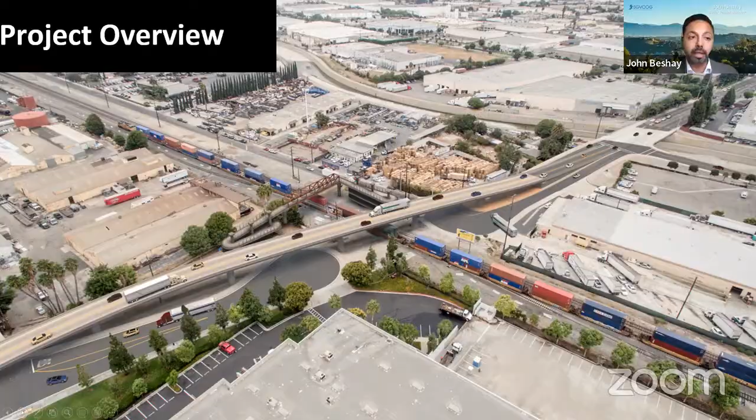The following design options were considered at the beginning of the project. First, raising Union Pacific Railroad tracks over Turnbull Canyon Road. Second, lowering Union Pacific tracks under Turnbull Canyon Road. Third, lowering Turnbull Canyon Road under the Union Pacific tracks. Fourth, raising Turnbull Canyon Road over Union Pacific tracks. And last is not to build a grade separation and do nothing.

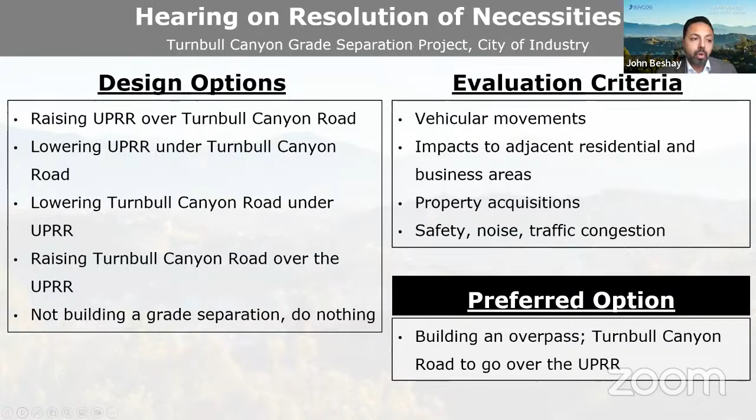Based on the evaluation criteria of vehicular movement, impacts to adjacent residential and business areas, property acquisitions, safety, noise, and traffic congestion, the preferred option was to build an overpass, which is Turnbull Canyon to go over the Union Pacific tracks. Next slide.

Now our legal counsel, David DeBerry, will provide brief introductory remarks regarding the resolution of necessity. David? Yes, thank you, John. And again, I apologize to the committee, for some reason my camera is not working. Before I start, I also wanted to introduce one of the partners in my law firm, Craig Farrington, and he's heading up the eminent domain acquisition. So if there's specific legal questions with respect to any of the particular RONs, I'll probably defer to Mr. Farrington to answer those questions.

But as was mentioned earlier, as I think all of you are aware, we now have a two-step process for adoptions of the resolution of necessity. First, it comes before the Capital Projects Committee to make a recommendation to the governing board whether or not to consider the final adoption of the resolutions of necessity. And what we're asking this committee to do is, in making that recommendation, to consider the same four things that the governing board needs to consider under the eminent domain law as to whether or not the resolutions of necessity should be adopted. And those are on the screen before you. I'll just go through them quickly.

And when we go into more detail on each resolution of necessity, the findings and the facts behind making these findings will be presented by Mr. Mendoza, who's a project manager. So the first one is the public interest and necessity require the project. The second, the proposed project is planned or located in a manner that will be most compatible with the greatest public good and least private injury. The acquisitions of interest in the property is necessary for the proposed project. And the last one is that the COG has made offers to purchase interest in the property as required by the government code.

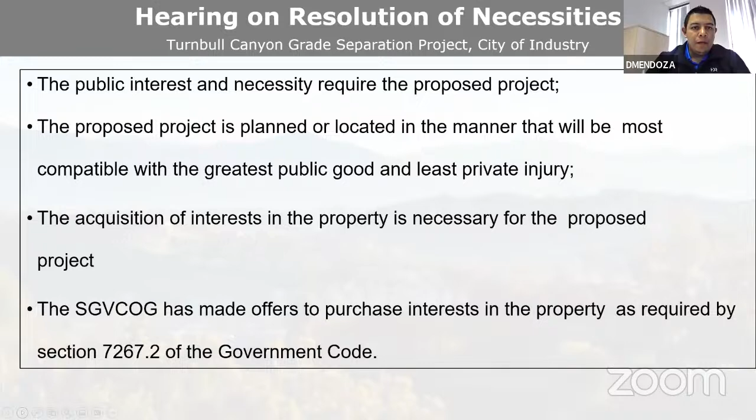Correct. I'll take it over. Okay. All right. We can go to the next slide. I'm going to touch a little bit on the parcels here. This is a 22 parcel project. Danny, sorry to interrupt you, but I see President Shevely has her hand up. Okay. I did, and David DeBerry, yes. I did have a question, given the public comment item about the legal descriptions. Is there anything that we need to be considering as a part of this recommendation?

No, on the legal descriptions, though, we can't change the take because we've already made an offer. So we could certainly have Mr. Nelson take a look at those. But as far as the property that we're taking, those can't be modified. Otherwise, we'll have to make a new offer. So we'll have to just get together with Josh after the meeting and see what his concerns might be. But if they don't change the property interest that we've made an offer for, then we'll be fine. Okay, great. Thank you.

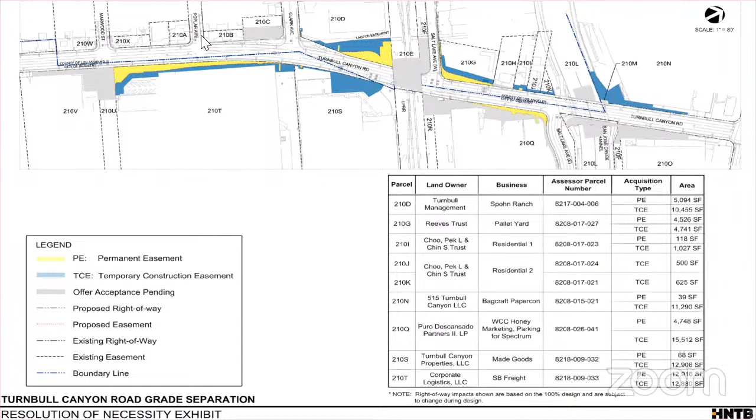Okay, so this is a 22 parcel project. Right now we have possession of the majority of those parcels. Right now, for this RON, we're looking at 8 parcels. Those 8 parcels are identified on the table that's listed right underneath the project map. So I'll go into each one of those parcels. If you can just go down to the next slide.

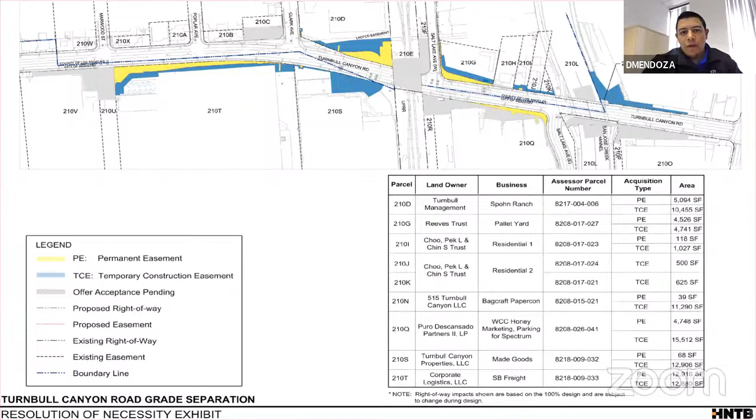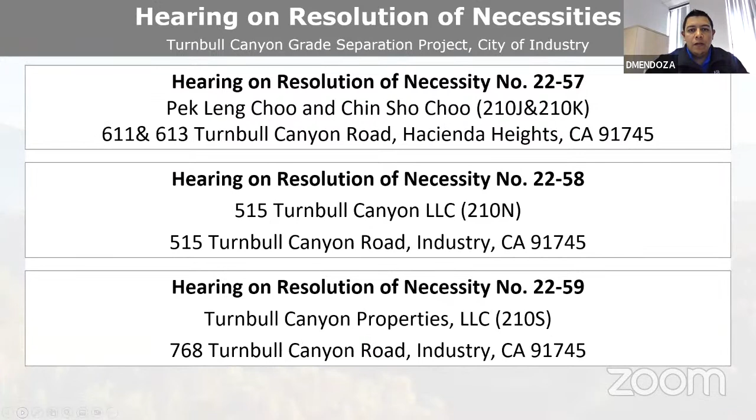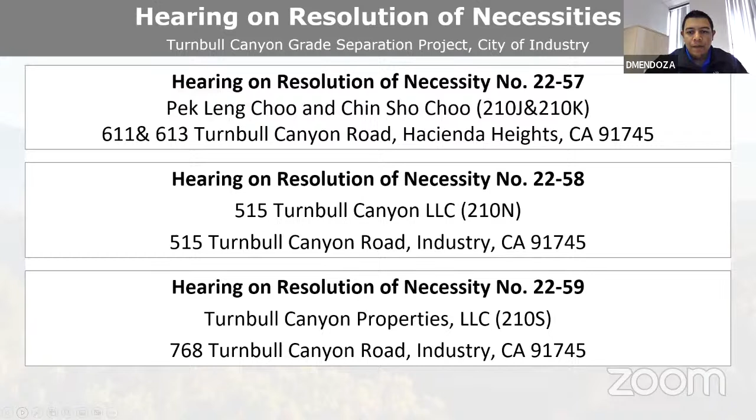First parcel up is going to be RON number 2254, Turnbull Management, followed by 2255 Reeves, 2256 Choo. Next slide is going to be Choo as well, 2257, 2258, 515 Turnbull Canyon, 2259 Turnbull Canyon Properties. On to the next one, 2260 Corporate Logistics, and the last one will be 2261 Puro Descansado.

So if we can go to the next slide, I'm going to touch a little bit on 2254, which is Turnbull Management. Turnbull Management's a 242,000 square foot lot zoned for manufacturing. Sits on the northwest corner of Turnbull Canyon Road and Clark Avenue. There are 4 takes on this property. Those takes include a 4,942 square foot roadway easement, a 3,213 square foot bridge easement, a 154 square foot SCE anchor easement, and a 60-month 10,455 square foot TCE. This property right now is operated by Roll-Off Services.

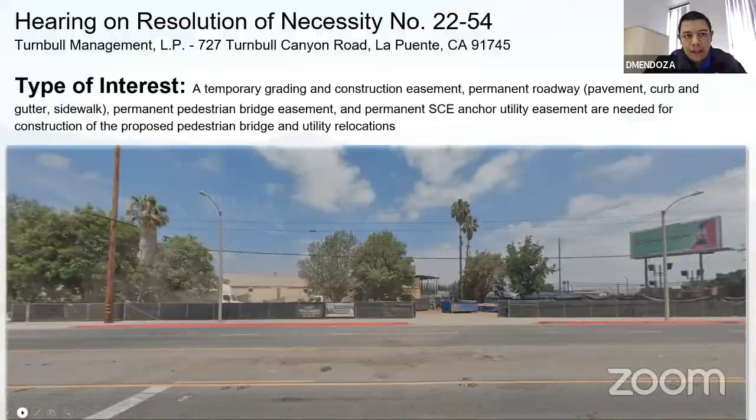This is the one property on this project that has the potential for relocation. This portion of the property is part of a larger parcel, and this portion is being heavily impacted. I think if we can go to the next slide. Yeah, so this slide here shows what the impact is here. What's shaded in that teal color is the temporary construction easement, 60 months. What's shown in the purple is going to be the roadway easement. This is going to be the end of a cul-de-sac.

And what you can see hashed in green, closer to the railroad tracks, is the bridge easement for the pedestrian overcrossing bridge. And if you can see in yellow, it's a small piece, that's the proposed SCE anchor easement. This property was appraised by Thomas Pike July 1st of this year and was reviewed by Hennessy and Hennessy September 7th. And an offer was made to the property owner on October 14th. The next parcel.

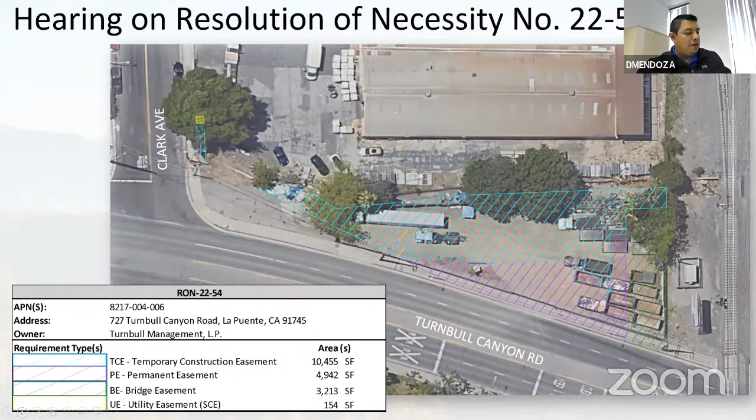So the next parcel is 2255. This is the Reeves parcel. It sits at 15151 Salt Lake Avenue. It's approximately a 32,000 square foot lot, zoned for storage and office space. Sits on the northwest corner of Turnbull Canyon Road and Lake. There are 3 proposed takes on this property. The first take is a 4,020 square foot roadway easement. The second is a 506 square foot SCE anchor easement. And the last is a 60-month, 4,741 square foot temporary construction easement. This property is operated by Pacific Coast Pallets.

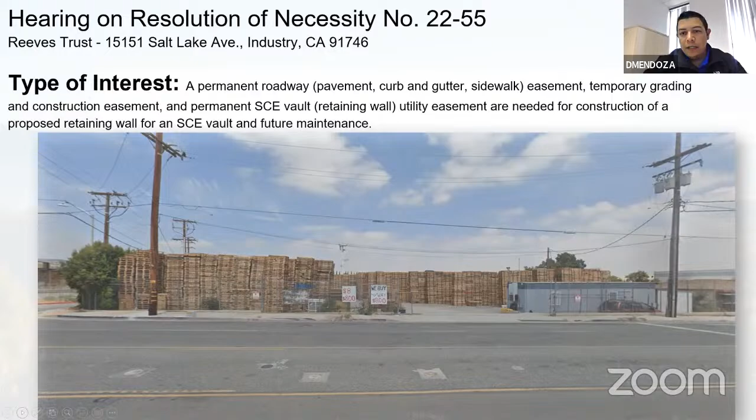This property also has some significant impacts. Although they are significant, they are all being looked at. If you can go to the next slide that shows where those takes are. So again, in purple, we have the roadway easement, which impacts the parking. Access will be maintained throughout construction. The temporary construction easement does impact their office building, which you can see on the lower right-hand corner. As part of the construction, it's a movable building, and that'll be moved outside of the TCE area.

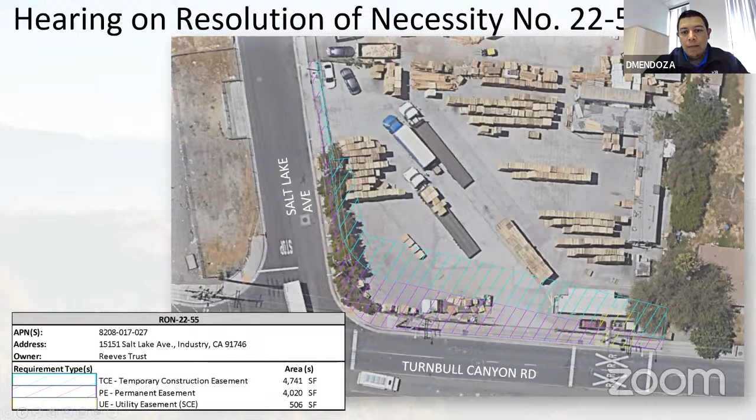There is an Edison easement that's going to be impacting the restroom facilities. Those are also going to be relocated. An appraisal was prepared by Tom Pike on July 1st and reviewed by Hennessy and Hennessy September 7th. And an offer was made on October 14th. Again, this parcel here has some impacts to the operations of the business. We did decide that even with these impacts, the property would be able to maintain their business and circulation. On to the next one.

So the next parcel is RON number 2256. It's owned by Choo. It sits at 617 Turnbull Canyon Road. It's approximately 12,500 square feet, zoned for residential, sits on the west side of Turnbull Canyon, just north of Salt Lake Avenue. There are 3 proposed takes on this property. Those takes are a 16 square foot roadway easement, a 102 square foot SCE easement, and a 60-month, 1,027 square foot temporary construction easement. We can go to the next slide.

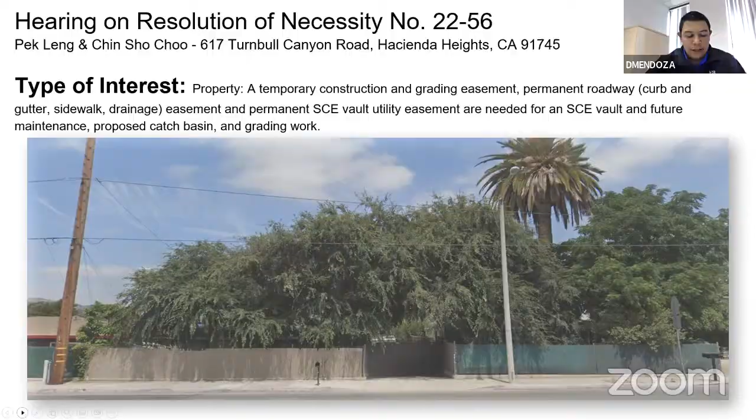So this is a single family residence. As you can see, the temporary construction easement does impact the majority of their front yard. The SCE easement is a permanent easement that SCE is requiring for the placement of a transformer. That'll be sitting in their front yard. We did confirm that 1 tree will have to be removed due to the SCE vault easement, but we did confirm also that access will be maintained for the entire property throughout construction.

This property here was appraised by Integra Realty August 23rd, and reviewed by Hennessy & Hennessy on September 7th, and an offer was made on October 14th. Next one.

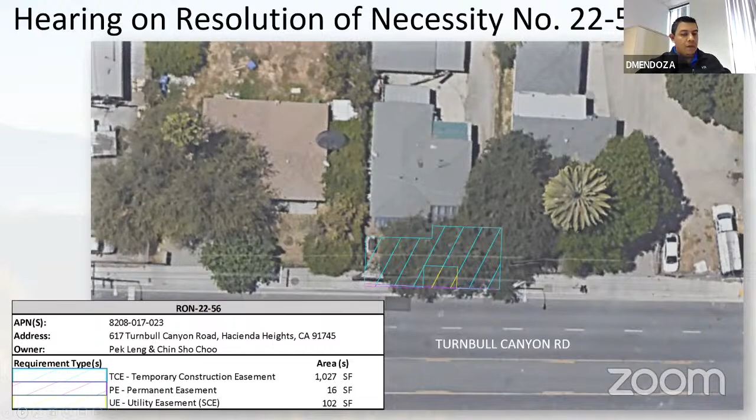Next one is RON number 2257. This property is also owned by Choo. It sits next to the previous property. This property has an address of 611 and 613 Turnbull Canyon Road. Again, this is 2 lots that total approximately 15,500 square feet. This property is different from the neighboring property. It's zoned for industrial and multifamily.

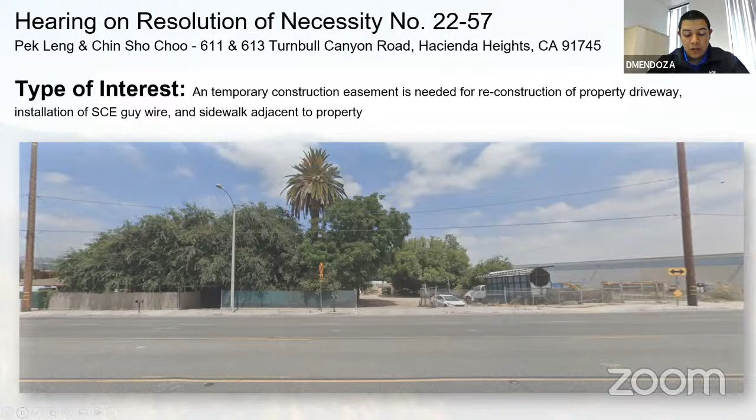This property does have 2 proposed takes, smaller and less impactful than the neighboring parcel. This has 2 temporary construction easements. One is for 500 square feet. The other one is for 625 square feet. They're both 60 months. You can go to the next slide.

So this property here does have the temporary construction easements. There are no significant impacts. Access will be maintained to both properties throughout construction. And an appraisal was prepared by Integra on August 23rd, reviewed by Hennessy & Hennessy on September 7th, and an offer was made October 14th. The next one.

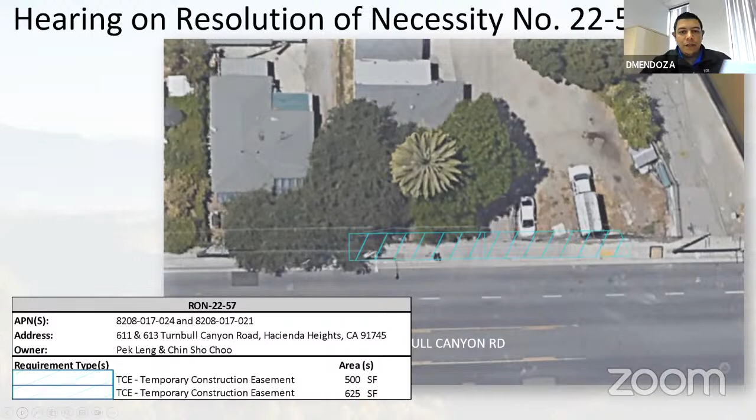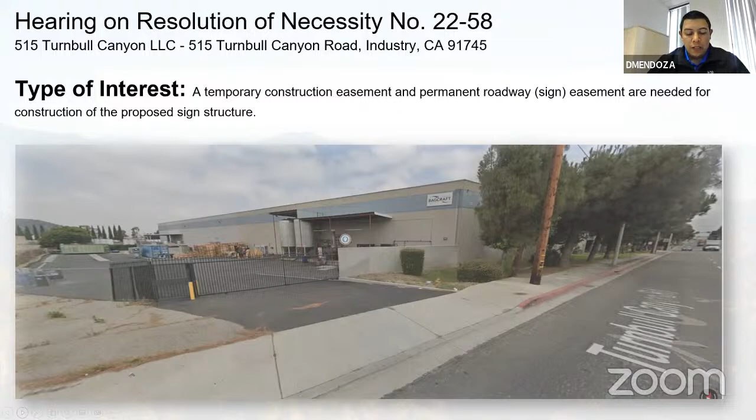This is RON number 2258. Owner is 515 Turnbull Canyon LLC. This is a parcel that's approximately 175,000 square feet, zoned for industrial warehouse, sits on the west side of Turnbull Canyon Road, just south of Don Julian Road. There are 3 proposed takes on this property. Those takes include, if you can go to the next slide, a 39 square foot roadway easement, a 5-foot footing easement, and an 11,290 square foot temporary construction easement for a duration of 60 months.

The property is operated by Bagcraft. The roadway easement is very, very small, and it sits on the north side of the property. You can see it here. It's outlined in purple. The teal color represents the temporary construction easement. It does impact several trees and shrubs. Also impacts their block wall, which will be replaced in kind as part of construction. Although impacting the driveways, access will be maintained throughout construction.

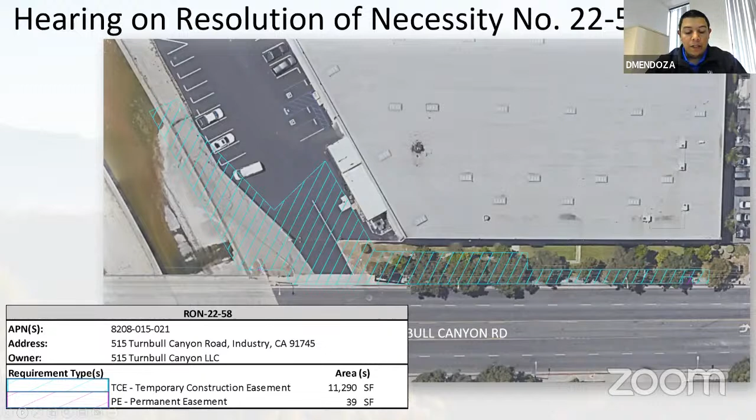And on this property here, an appraisal was prepared by Thomas Pike on July 1st, reviewed by Hennessy & Hennessy on July 25th, and an offer was made to the property owner on October 14th. All right, next one.

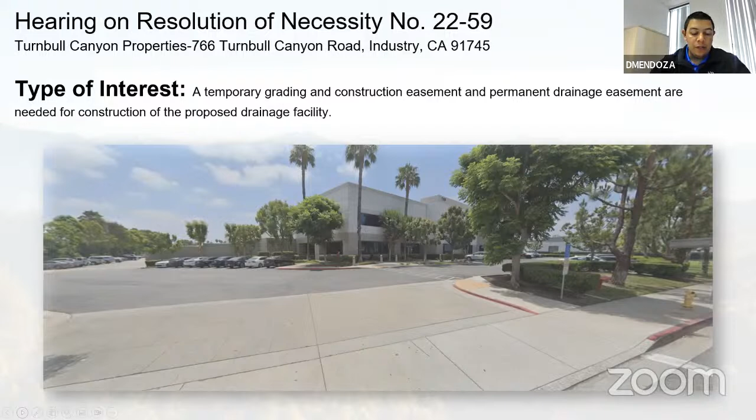Next one is RON number 2259. The property is owned by Turnbull Canyon Properties. It's approximately 2,056,000 square feet. It's zoned for industrial warehouse. It sits on the east side of Turnbull Canyon Road, just north of Clark. So now we've switched to the other side of Turnbull. There are two proposed takes on this property. The first take is a 68 square foot roadway easement and a 60-month, 12,906 square foot temporary construction easement. You can go to the next slide.

So this property is operated by Rio Water Technology. There are impacts to the landscape area. The TCE will require the removal of shrubs and a few small trees. Access will be maintained throughout construction of this property. As of last week, we did strike a deal with this property owner, and we are waiting for signed offer acceptance and agreements.

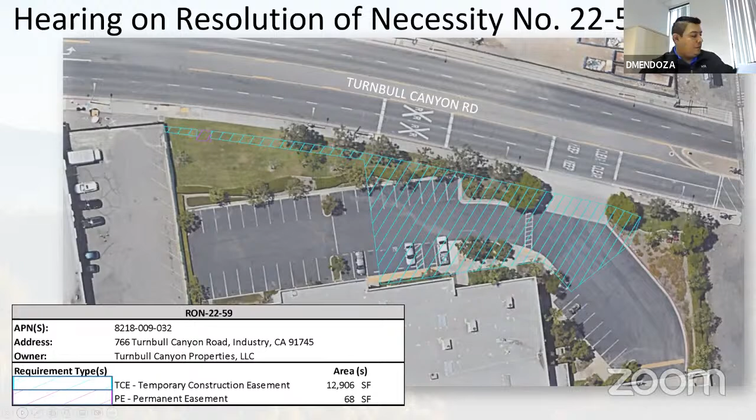This property was appraised by Thomas Pike on July 1st and was reviewed by Hennessy & Hennessy September 7th, and an offer was made October 14th. Okay, next one.

This is RON number 2260. This property is owned by Corporate Logistics LLC. The property is approximately 592,000 square feet. It's zoned for heavy manufacturing. This property also sits on the east side of Turnbull Canyon Road, just south of Clark. There are three proposed takes on this property.

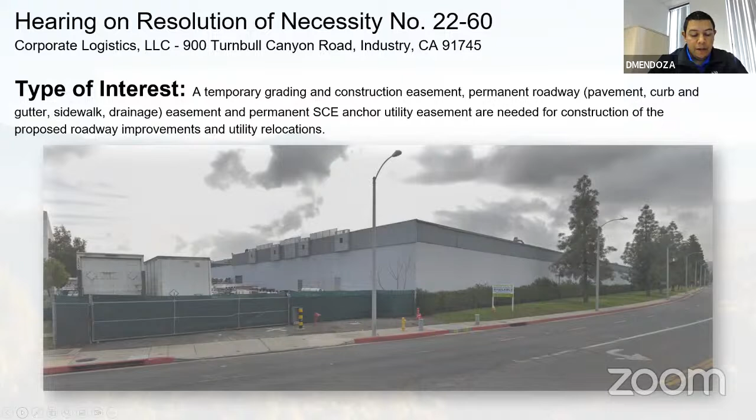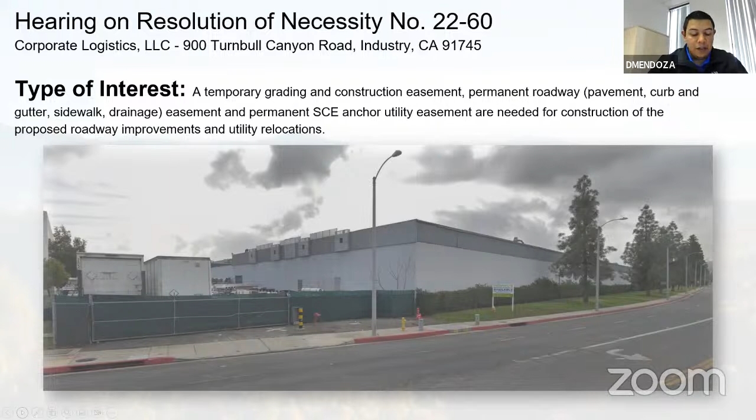The first take is a roadway easement. That's 12,755 square feet. There's an SCE easement, 161 square feet, and a 60-month, 12,880 square foot temporary construction easement. You can go to the next slide.

So this property here has some larger areas. Although larger, they're mostly within the landscaping area. The roadway easement will require the removal of several trees and their concrete wall, which will be replaced during construction. We also confirmed that access will be maintained throughout construction on this property.

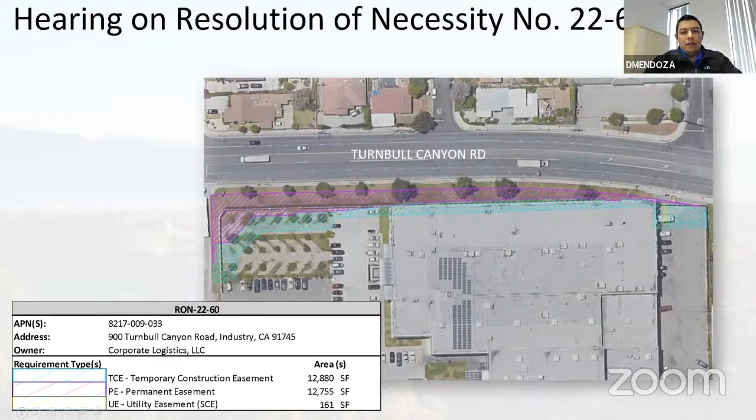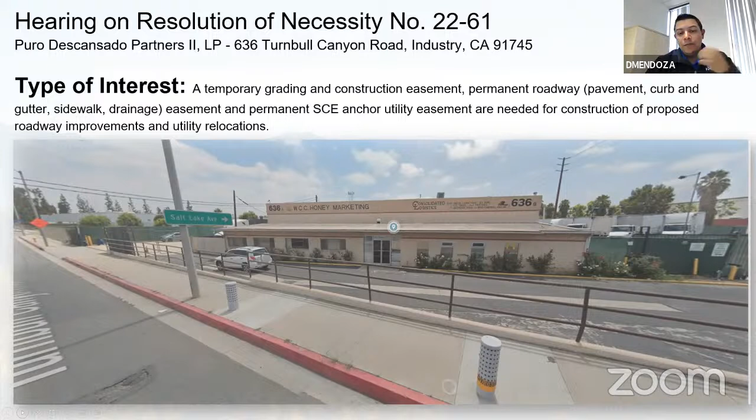Those takes include a 4,501 square foot roadway easement, a 247 square foot SCE easement, and a 60-month, 15,512 square foot temporary construction easement. You can go to the next slide, please.

So this is a fairly large property that's broken up into two different businesses. On the south, we have a company by the name of WCC Honey, which has some impacts. They have parking along the frontage of Turnbull Canyon Road that is planned to be replaced with additional parking on the property to the south, which is owned by Southern California Edison. We will be replacing parking for parking. So we're going to be able to match what parking they currently have.

This property here, we put together a construction phasing plan that confirmed that access will be maintained throughout construction using various methods. The property to the north is a Spectrum parking lot. The proposed SCE anchor easement will require the loss of at least 2 parking stalls. The property will maintain code compliance even with the removal of those 2 parking spaces. Very similar to the honey manufacturing, access will be maintained throughout construction.

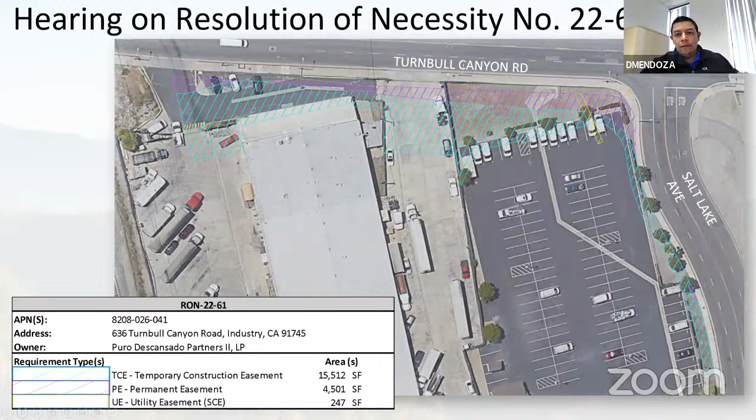So again, this is a larger parcel, 2 property owners. We do have a construction phasing plan that does confirm consistent access through construction. This property was appraised by Integra Realty on September 19th, was reviewed by Hennessy & Hennessy September 23rd, and an offer was made to the property owner on October 14th. So that concludes our parcels as part of this resolution.

All right, colleagues, do we have any questions or comments on these items? I see Vice Chair Hepburn has his hand up. We'll start with him. Tim, go ahead. Just a question. So basically, all the offers as stated in the packet have been made, but the one offer, which was a couple parcels back, you're in negotiations to settle that. Is that correct? Correct. That's for 210S. That's RON number 2259. 2259. But everyone else, it's still in their hands. No response yet. Is that correct? Correct. Okay. Thank you.

This is David DeVere. I just want to clarify. So the one offer has been accepted. We just weren't able to get a final signature on that particular agreement before this matter. And of course, negotiations will continue with all the property owners, irrespective of what the committee does here, or even up to and past the time the board adopts the resolutions of necessity. Thank you. All right, thank you. Let's go to Member Lyons.

Thank you, Chair. I think I have really the same question that Tim just asked. You know, this is a lot, and the fact that there's only one deal struck, have we heard back from the other property owners? Or, you know, what's going on? Is it way too low? Can you shed any light on why there's so many that haven't responded yet, or there's only one deal? So we are going over 8 here, but the project has a total of 22 parcels. The remainder of the parcels we have already struck deals with, and those ones are pretty much already done. These are the last remaining parcels.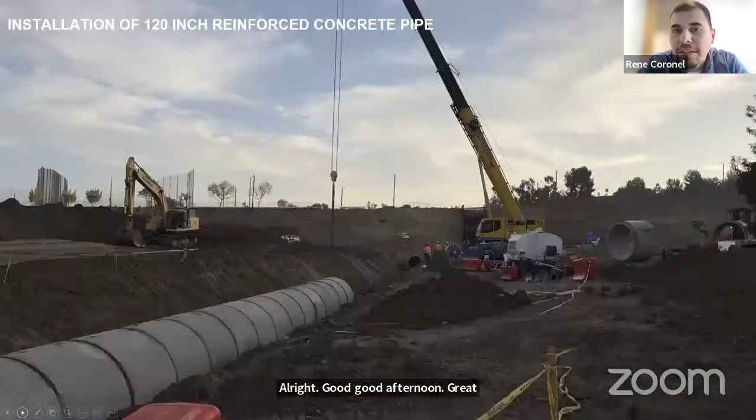Alright. Good afternoon. Construction continues on the Diamond Bar Golf Course project. In this pipe, you see we're making progress with the 120-inch reinforced concrete pipe. It's a pretty large pipe. Once we got into excavating, it's moving along pretty quick. The next set of activities is connecting the joints and backfilling it. So hopefully we get it in before the rainy season that's coming up. Next slide.

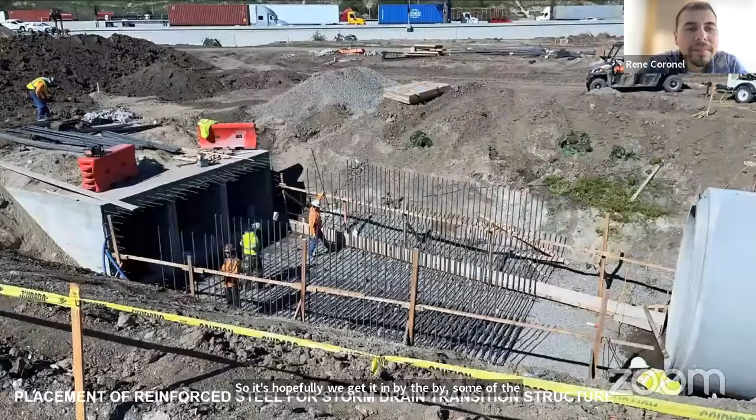In this slide, to your right is a piece of pipe that's been laid, and to the left of it is the other one that connects to the Caltrans system. So in the middle, what we're going to do is a cast-in-place transition structure. It's how you connect the box to a circular pipe. So we're making progress on that. It's a lot of rebar. We're hoping to have that in the next couple of weeks. Next slide.

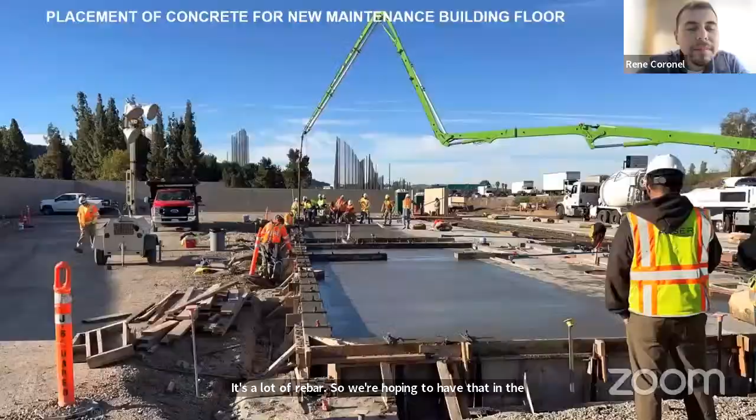I don't know if you've noticed, but when you drive on the freeway, the block wall for the new maintenance building is up. It's a pretty large maintenance building. This is a concrete slab, the floor. So you saw a lot of rebar. We've been putting all of the utilities in there. So now that we put the utilities in, we're laying the concrete down. And the last slide.

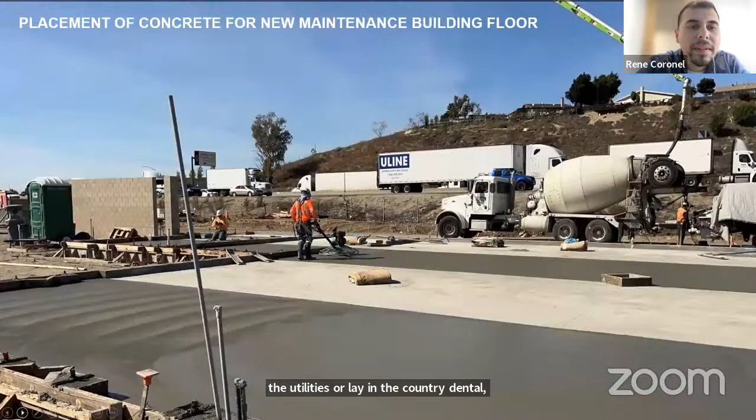And yeah, some of the concrete's been curing, some of it's been drying. The next step is to start erecting the steel for the physical building. So we hope to have the building up pretty soon. And then what we're going to do is move into that new building as part of our field office in the meantime, so we can start clearing out the parking lot. That concludes my presentation for the Diamond Bar Golf Course, and I can answer any questions.

Thank you very much, Rene. Do we have any questions or comments on this item? Okay. If there are none, then we have the next presentation.

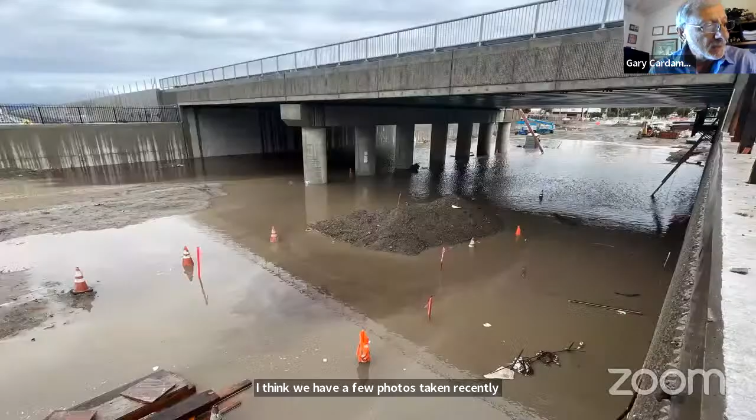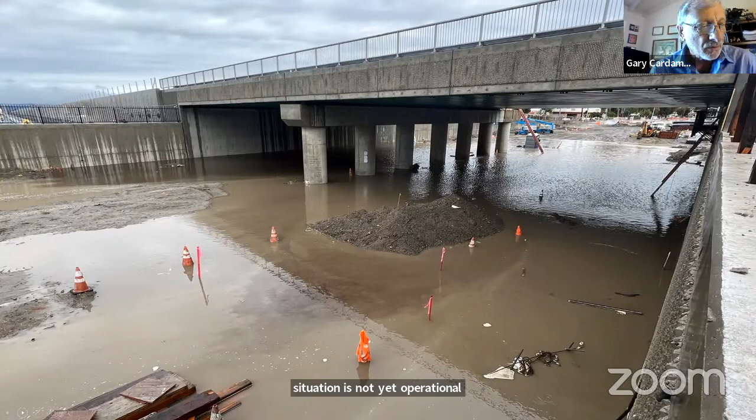Chair Moss, members of the committee, I think we have a few photos taken recently from the Fairway project. So the first photo, as you know, we got a fair amount of rain in early November. It created a little bit of a problem for us in the underpass area of the bridge. And unfortunately, the project's pump station, which would have mitigated this situation, is not yet operational. So this set us back a few days while the area dried out. Next photo, Yanine.

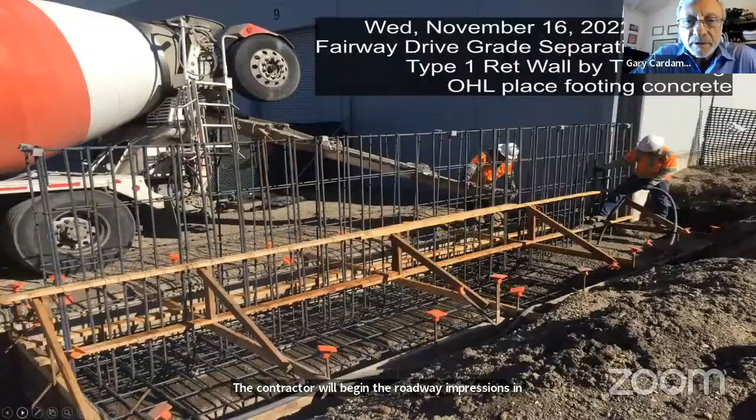Next slide, Yanine, please. This third photo shows a concrete pour for the footing of a retaining wall on the west side of the THTC property at Business Parkway and Fairway. Retaining wall and sound wall work is continuing on both the UP right-of-way and on adjacent private property. The last schedule update from the contractor shows project completion around the end of March of next year. And we're still hoping that we can make that date if the weather cooperates over the next few months. That's all I have on Fairway today. Happy to answer any questions you might have.

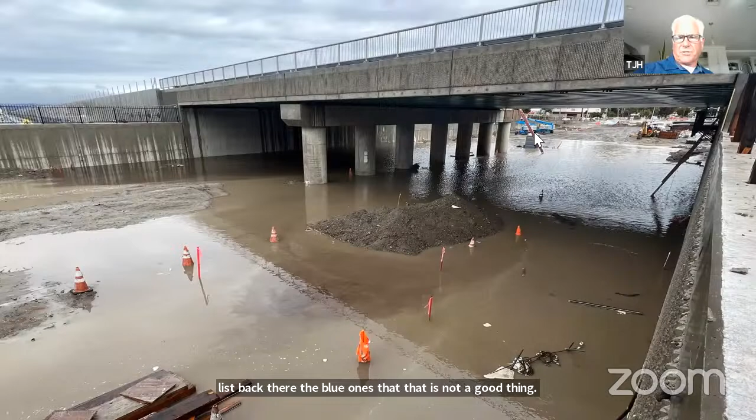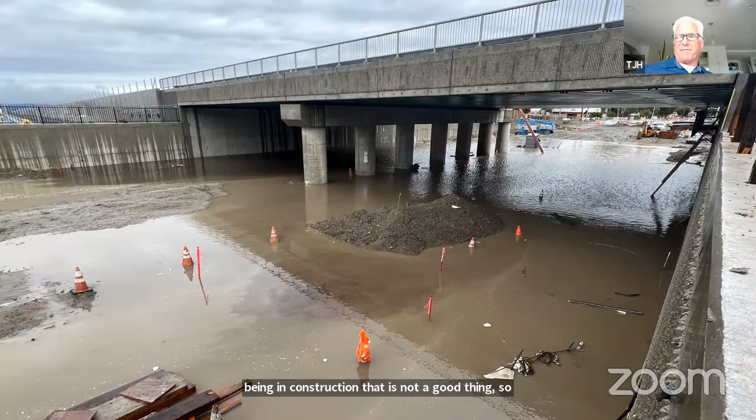Thank you very much, Gary. I see a raised hand from Vice Chair Hepburn. Tim? Gary, could you please go back to that first slide? I just wanted to make a point. I want you all to look back on the side by those two boom lifts back there, the blue ones. That is not a good thing when an outhouse is halfway up with water. So just so you guys know that. Being in construction, that is not a good thing. That's a lot of water because that's probably almost 3.5 feet, 4 feet. That's a lot. So anyway, just gotta throw that out there, guys. Thank you, Gary.

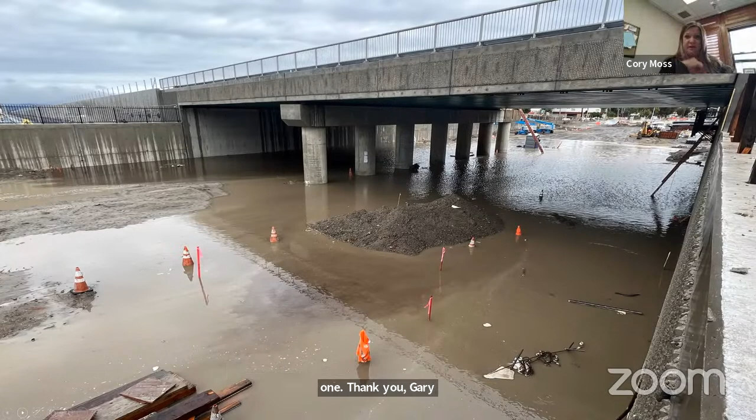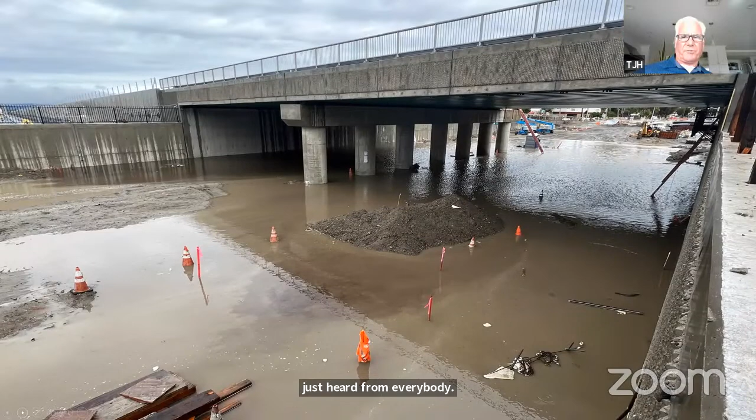That's a lot of water. I was actually out of town when that storm hit, so I just heard from everybody what a tremendous amount of rain we got. But wow, we had 3 inches in La Verne up here where I live, and it was crazy. I can only imagine, that's a lot of water.

Yeah. So Gary, you said the pump station that we have was not operational. Did this just dry out on its own, or did we have some other way of pumping water out of there? Well, yes, the contractor did manually pump the area dry, but we're very close to commissioning the pump station. Unfortunately, we just didn't have it online prior to this storm hitting, which would have made the situation much better. That would have been too much like the right thing to happen. You had to get a storm just before you got it finished.

Okay, so if there's no further questions or comments, do we have any other presentation? We do not, Chair Moss. Oh, sorry, we do have Fullerton. So sorry. Yeah, on Fullerton, I do want to spend maybe a little more time than usual.

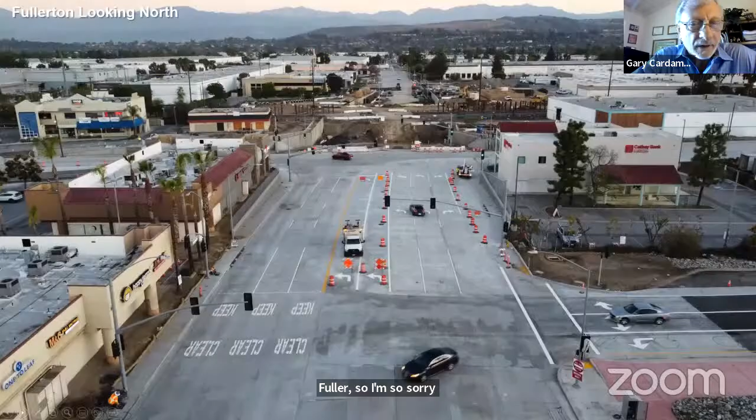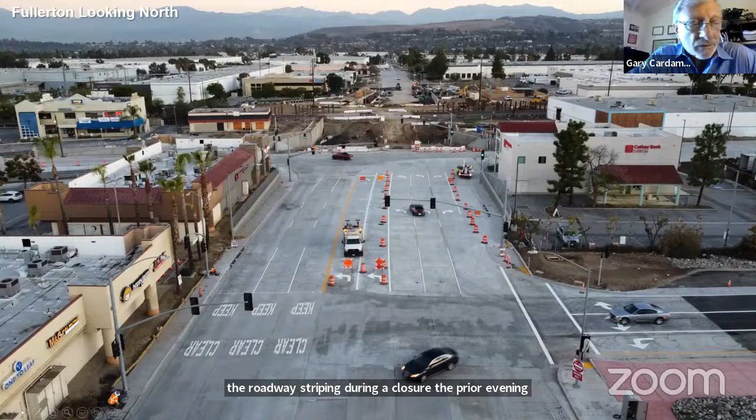This first photo is looking north along Fullerton at the westbound SR-60 off ramp. This photo was taken last Tuesday morning, November 14th, after the contractor had completed the roadway striping during a closure the prior evening, and the new improved roadway was open to traffic that morning. You can see the two left turn lanes onto westbound Gale and the one right turn lane onto eastbound Gale, and three southbound lanes on Fullerton. Next photo, Janine.

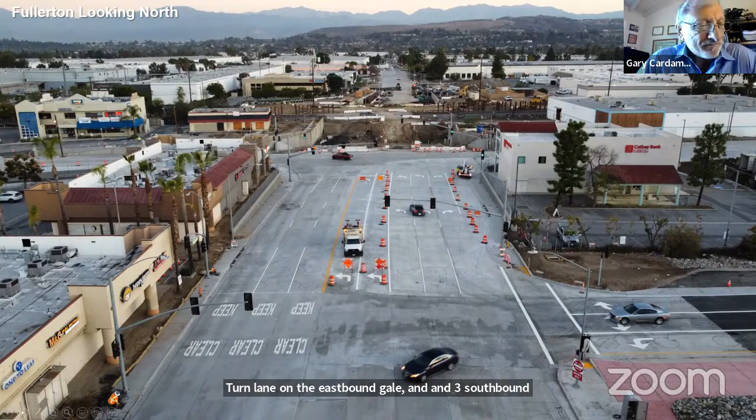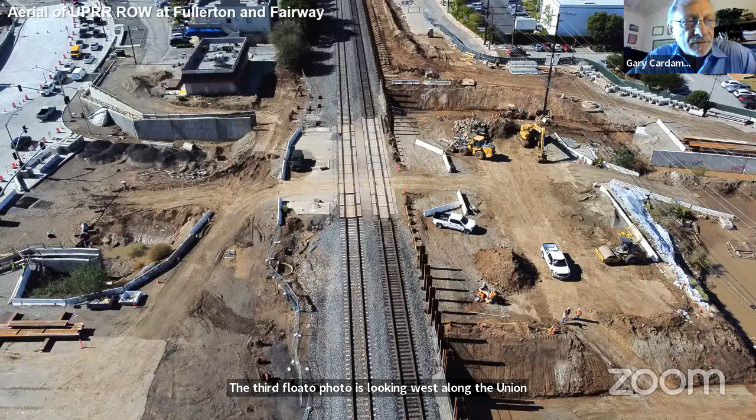The third photo is looking west along the Union Pacific Railroad right-of-way at Fullerton. And you can see just right of the tracks, there are a couple of large excavations which are necessary to construct the 10-foot wide by 4-foot high reinforced concrete box storm drain that has been rerouted around the underpass in a horseshoe configuration to the north and must go under the shoofly and the new mainline tracks. You can also see the temporary retaining wall supporting the mainline tracks at these excavations.

You may recall last month I advised you that we were about 4 months behind schedule due to the challenges in obtaining Union Pacific approvals to perform work in their right-of-way, and that we would be looking for opportunities to mitigate those delays. The need to mitigate these past delays became very urgent this month, and I wanted to bring to your attention today that we have had to direct the contractor to accelerate the work on the shoofly,

as we were notified by a UPRR representative on November 1st that if we miss the scheduled shoofly cutover date of February 1st of 2023, the UP crews were committed to other work and there would not be any other opportunities for UP crews to perform the cutover work until 2024. That would mean an approximately 1-year delay to the project. And obviously that would represent a significant impact, not only to the schedule, but also on the cost of the project. So we immediately directed the contractor to prepare an acceleration plan to meet the scheduled cutover date.

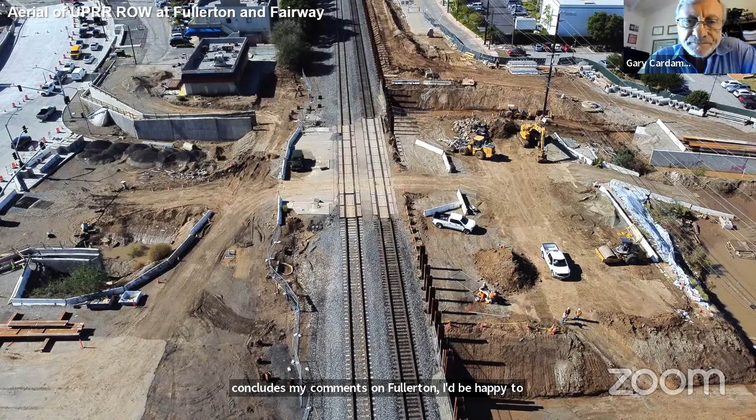All right, thank you very much, Gary. And yes, I would expect we do have several comments on this. So we'll start with Member Hepburn. Tim?

Sorry about that. Okay. So basically, all these delays were caused by UPRR. And now they're telling us that after all these delays, we have to accelerate because they will not be available for us, after they've made all the delays because of their engineering, and an additional 1 point some million, which will probably be more than that, knowing overtime and everything else with acceleration. That's very frustrating. I can only imagine, Gary, what you're feeling right now. I know we've talked about this, and this is taxpayer dollars. This is very frustrating to me.

I know previous Chair Lyons, Chair Moss, Diana Mahmood, everyone involved. This is our taxpayer dollars, and it's just a waste of money because they held us up so tremendously. It's beyond frustration for me. Understanding we need to do it, it has to be done. But at the end of the day, these people need some oversight. This is just ridiculous, what they cost us, just for the shoofly and making the decision on how, when, and where. And now they're going to tell us it has to be done because otherwise it'll be years before we can get this done. That's just ridiculous.

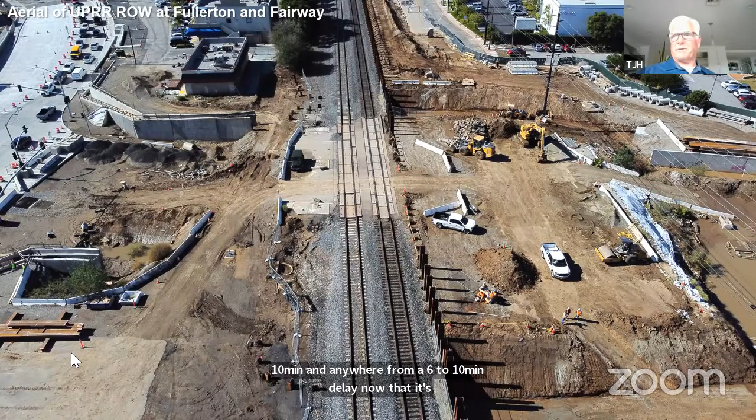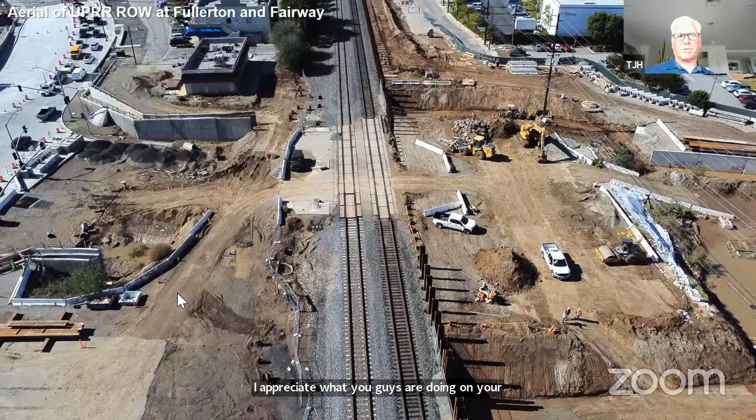I used to travel that all the time to go to Home Depot, and it's got zigs and zags, and the traffic lights, anywhere from a 6 to a 10-minute delay. Now that it's open, I'm sure that's much better. I think I've said enough, but the point is, we need to speak to our higher electeds to make sure this doesn't happen again, because it's costing all of us taxpayers additional money to finish this. So anyway, you're doing a great job. I appreciate what you guys are doing. I know what's under your control and what you've got with them. It's just very frustrating. Thank you. It has been very, very frustrating.

We are going to do everything we can to meet that cutover date because there really are no good options. Thank you very much, Gary.

Thank you, Tim. Let's go ahead and go to, I think Chair Lyons had her hand up next. Member Lyons had her hand up next. Nancy, you're still a chair. I love being a chair, so maybe I'll just take that with me out to the sunset.

Yeah. I agree with everything Tim said completely. And when we started the conversation this morning on Fullerton Road grade separation, and we heard that intersection opened 2 weeks early, I think all of us were feeling, oh, well, that's a really good thing. And finally, something's going right for this project. But UPRR is back again and our worst nemesis.

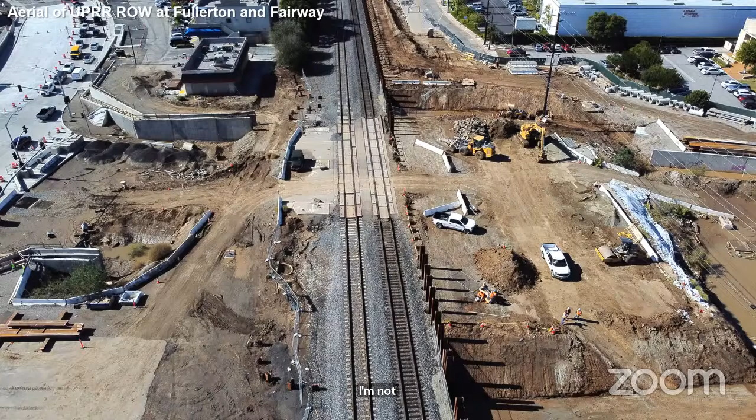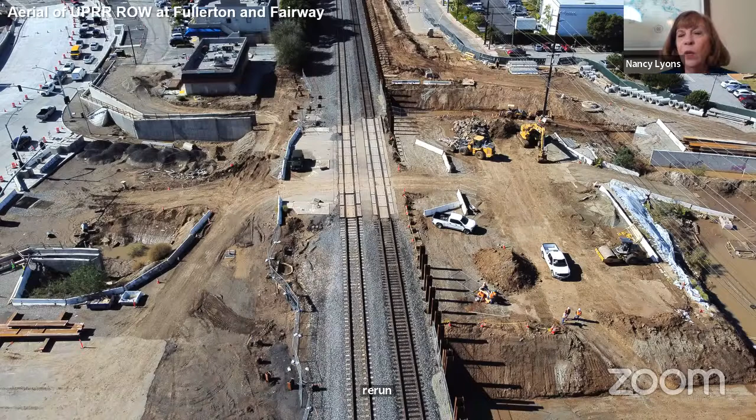And in terms of trying to go to electeds to get help, I think they're governed by Congress, aren't they? Who governs them? They're under federal regulations, but it's a private railroad. Yeah, and they know that. They seem to just do whatever they want, and they don't care what it's costing us. They're probably laughing. It's just a terrible situation, and I know my colleagues will give it serious thought and figure out how to fix it.

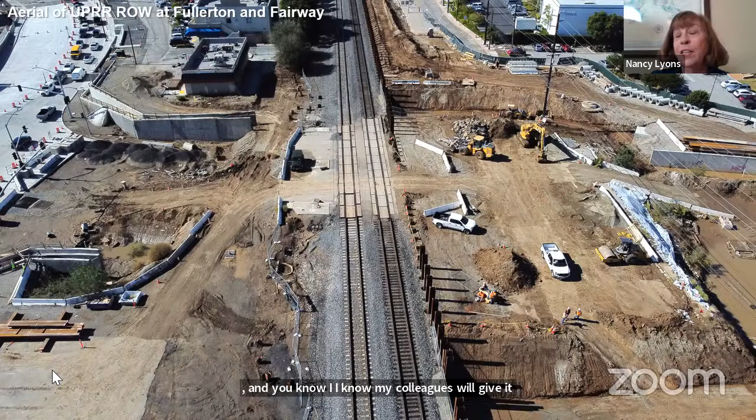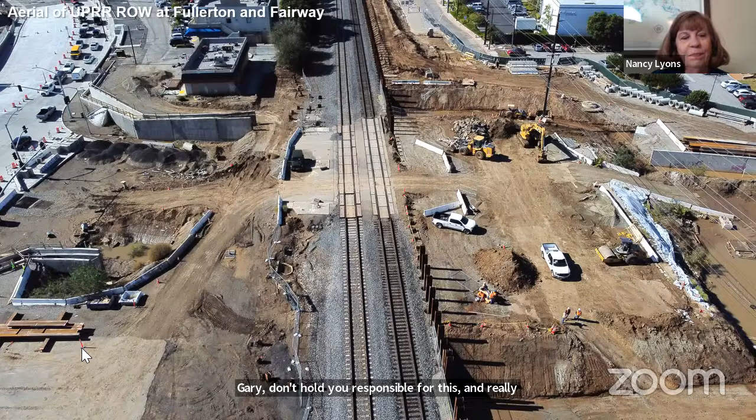So it's awful. Gary, we don't hold you responsible for this, and really appreciate the fact that you're being forthright with this bad news. But it's just disgusting. Thank you. Yes, I do share your frustration, and I've asked David, our general counsel, to look at those agreements with UP. It seems like we fully indemnify them for these kinds of delays, which is certainly unfortunate. But if there's any recourse, it would be through those agreements, the master and the C&M agreements that we have signed with UP. But they seem to be fully indemnified for these kinds of issues.

And that's so frustrating in the sense that, obviously I guess we have to do that. Otherwise we wouldn't be able to even get shovels in the ground to start doing these projects. But I mean, they answer to no one, it seems. Anyway, I apologize. I'm speaking out of turn. Let's go to Member Mahmood. I apologize for airing out my frustration as well.

Oh, not a problem. Well, I fully concur with the comments made by committee members Hepburn and Lyons, but it did prompt a question in my mind, as well as the chair, I should say. And that is, is the reason that Turnbull Canyon's preferred alternative is the elevated road because there's less potential delay caused by UP? I would think that with an elevated roadway they would have less of an opportunity to weigh in on the design. Because obviously we want to avoid this type of protracted delay as much as possible. And I think Turnbull and Montebello are the two final projects.

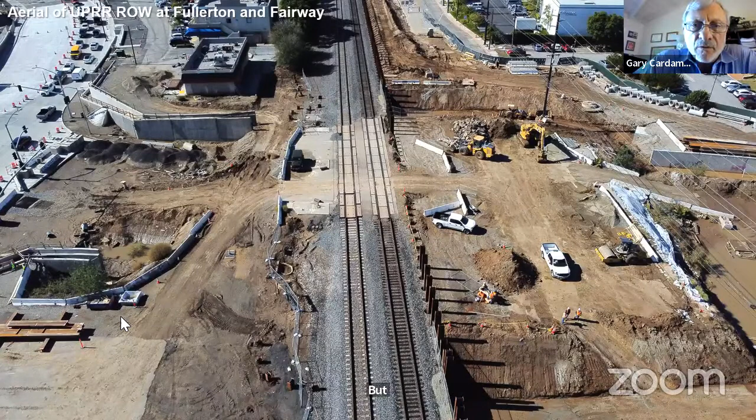Well, I'll defer to the Turnbull Canyon team, but my guess is that the UP right-of-way extends even above areas. I don't know how far or high up it goes, but I think you still may be dealing with UP approvals as you build over their right-of-way.

Well, I do think, as I recall, Montebello is going to prove another challenge, and whatever we can do to try to get ahead of this as much as possible by, if nothing else, writing to UP and telling them how much money they are now costing us because of their delay on this project and how urgently we expect them to work with us on the Montebello project, I think would be a good idea.

My other comment is I know several of my committee members are leaving after this month, and I just hope that the COG has a heck of a party once this project is finally completed, and that us alums are invited to celebrate the completion of this very frustrating project that has consumed certainly a lot of committee discussion time. Indeed, I agree with you 100%.

Okay, let's go to Member Hepburn. Sorry, just a real quick go back. As we stated before, I think our Ms. Creter, our director, I think we need to put just a short blurb together. I know we talked about this last time, but I think it's paramount that we do this right away, put just the estimated losses that we've had so far as cost overruns and delays, but also this one, as we say, this is the icing on the cake.

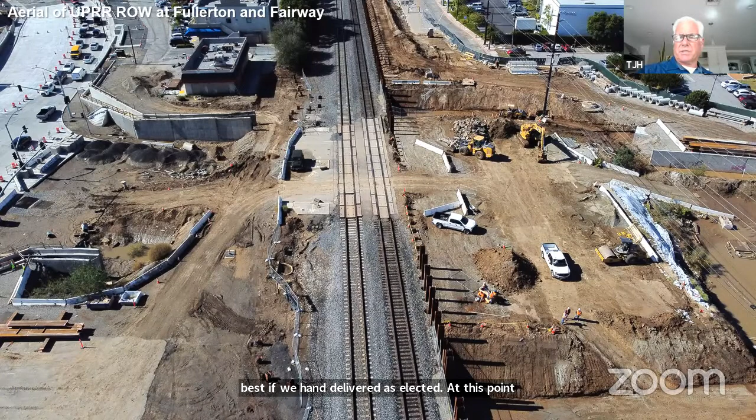And I think this is very important that we get this to our Congresswoman Grace Napolitano, get it to her right away. I have no problem hand delivering it, or I think it'd be best if we hand delivered it as electeds at this point, but it'd be properly laid out to just give a nice little blurb of how, where, and why.

And we need to give this to them because I think we need to focus on the tax dollars that they're spending, that they're wasting and basically throwing down the drain because they're not cautious and concerned about these projects. It's more about their own facilitation of their railroad, let alone tax dollars that people are spending. So I think it's very important. So if we could have that conversation, I think we need to do this right away.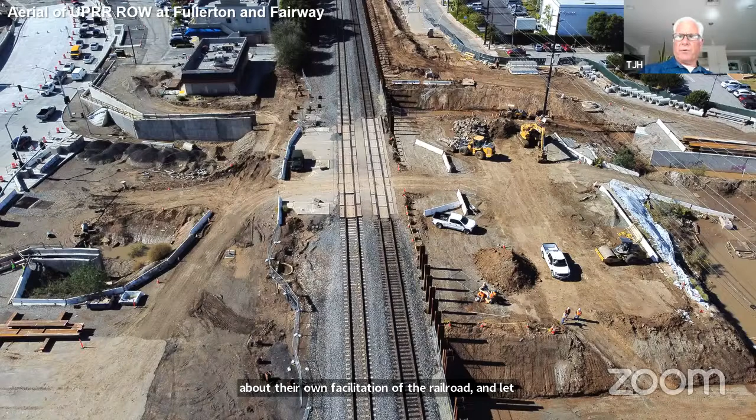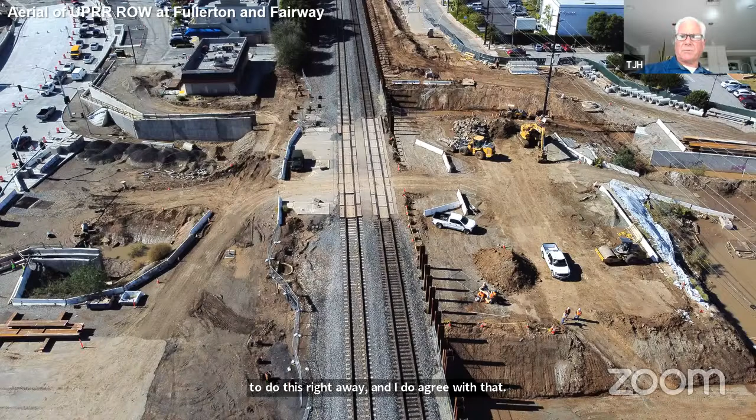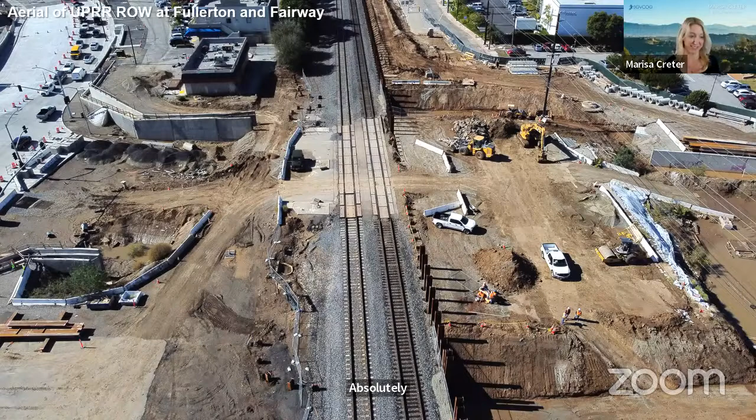And I do agree with Ms. Mahmood that this is important to get ahead of the Montebello, because that's going to be a real challenge of a project. So get this beforehand. So I'll do whatever I can on my part. Absolutely. Whatever I need to do. Thank you. Yes, definitely. Thank you very much, Tim.

Yeah, just a few more comments of my own, airing my feelings, but it's not only that they seem complicated or difficult. It gets to a point where it almost feels like some of this is intentional, and none of this makes sense. They're so uncooperative. I can't get over the fact that they're not willing to work with us to try and make this smoother. That benefits everyone.

And then for them to do something like this is just like salt in the wounds, after we have been fighting and basically begging for them to cooperate with us, and then to do something of this nature is shocking, actually. So anyway, I apologize. Do we have any other questions or comments on these presentations?

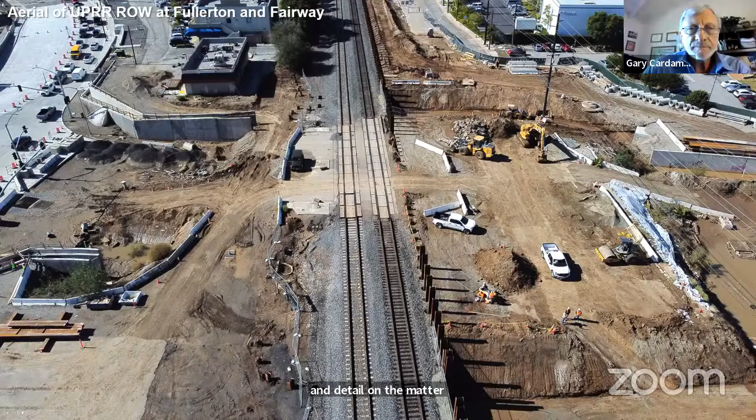All right, Gary, thank you so much. I know that you were not looking forward to having to bring that news to the members, but I do appreciate your clarity and detail on the matter. So if there's nothing further, that will bring us to item number 9, which is my report. And Diana mentioned as well that we do have some of our members who will not be returning, who chose not to run for election again.

And so at this moment, I want to express my deep appreciation for Member Lyons and Member Mahmood for your years of service, not just on this board, but on multiple boards and committees, as well as your commitment to your own cities. I just want to thank both of you. I'm sure the rest of the members will agree, and we'll take comments. I see that Member Hepburn would like to say a few words. So Tim, go ahead. And let me add also Member Jakubowski as well. Oh, okay. But I did come late to the party.

You're right. I apologize. It's been an absolute blessing to be serving with all of you. We've been on job meetings and some really heated discussions, and the changes of our construction committee have been all positive because of the input. I so appreciate Diana Mahmood's attorney aspect to open our eyes to the reality of what we're looking at, to make sure we cross our T's and dot our I's. And Chair Lyons for her focus and leadership, and Ms. Jakubowski's leadership and common sense.